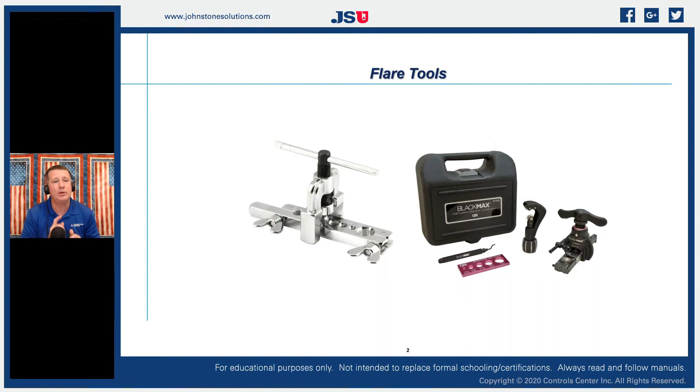We're starting to see a lot of changes to that. But the thing I always ask technicians is, do you still use a traditional flaring block or not? So let me launch a quick poll here to get an idea of how many people use a traditional flaring block over a more modern clutch style flaring tool. I'll give it just a minute or so, because what I see in the industry is quite a mix, and it depends on what you've experienced as you've developed into the industry.

So the poll says 67% say they do not, 33% say that they do. That's really where it comes into play, understanding the differences in flaring tools. I grew up with a traditional flaring tool, but it wasn't until I started doing training and understanding the benefits of a modern style clutch flaring tool that I realized how I've been doing things not so well over time.

One of the things we typically experience in the industry, especially working with manual flaring blocks, is when we have leaking connections, it tends to be one of two things: a split or crack in our flare, or a flare that just wasn't completely flared to begin with.

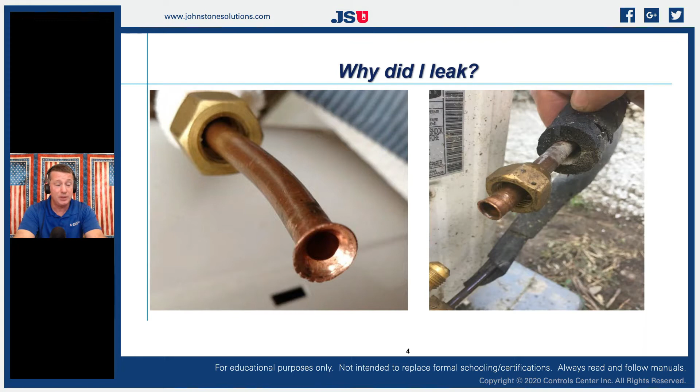And as we started moving into like R12 refrigerants, it was still fairly low pressure. As we are moving into higher pressure refrigerants, now we have to start thinking about the integrity of that flare a whole lot more. So we've started developing techniques and tools so that we can get consistent flares. And I'll be honest with you, I was pretty good at doing flares because I did them for a very long time.

But how could I judge the consistency of them? Not very well. So if we think about what we're doing with a flare - we're taking a drawn piece of copper, typically some type of soft copper. We're trying to take that copper that starts out with nice, clean, perpendicular walls, and we're wanting to bow those walls out at a particular angle, and then we're going to be able to take two mechanical fittings and put that copper in between them and allow that copper to now become a seal between those two mechanical fittings.

So for that to be a seal, that means I'm going to have a little bit of compression on that surface. And that's where we start understanding the difference between using the traditional mechanical block and the modern clutch style, because that amount of torque that I use when I'm making that flare is going to determine whether that lip is actually going to be able to be compressed into a seal or not.

Because if you use a high amount of torque on that traditional flare block, we're going to compress that copper to where it's no longer malleable, to where it's very rigid and is not truly a seal. It's just another form of hard material between our two very hard pieces of material, typically steel or brass, for our fittings, both for our flare and for our male fitting.

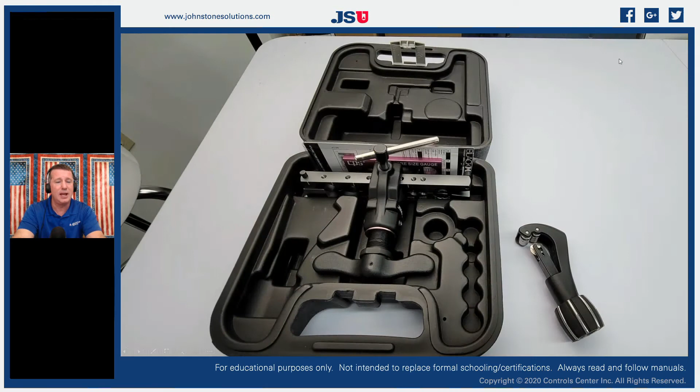So getting a proper seal between those two fittings is now becoming a whole lot more critical. So in our classes, we've been doing a lot of training on using the clutch style flaring tools, and that's what we're going to talk about a little bit today.

So my brand of choice is the CPS, the Black Max stuff. Everyone makes one - Yellow Jacket, JB, they all have some type of clutch style flaring tool, which I'm going to show you here in a minute why it is so much different than a mechanical block.

And we're also going to talk about spring controlled tubing cutters. Even though that would look like a traditional tubing cutter, it's actually not exactly the tubing cutter that you're used to using, and I'll show you why here in just a second. And we're going to use a gauge to be able to make sure that we get consistent flares, to make sure that we're getting the correct diameter so that we have enough of our surface to be able to compress and to make a seal.

So let's talk about this one real quick. On a traditional tubing cutter, we simply have a solid armature between our handle and our pushing rod, which is going to put the pressure on our copper. But you'll notice on some of these modern tools, we've actually got a spring inside of that.

And that spring is going to put constant tension onto that cutting tool. So with these, instead of not knowing exactly how much pressure to put on that tubing before we start cutting, now we have an exact amount of pressure that we can put on that thing, so that we're not putting an excessive cutting ring into that copper.

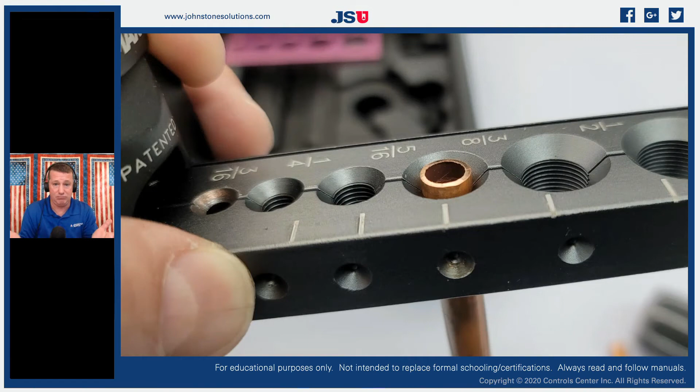So when we move our flaring chuck up over the block to the proper place, we even have indicators so that we know exactly where to line up our chuck, because our chuck is actually going to be perfectly centered into the middle of that hole. And if you remember, those of you that have used a traditional flaring block, there's no such thing - hopefully you get it centered.

And remember, on those traditional ones, that conical flare is centered, and it does not rotate at all. It sits perfectly centered. So if I don't get that perfectly centered on my copper, I have the chance of actually wobbling over to the edge. I've done that before and had a flare that's kind of cockeyed.

So we're actually going to use dimples that are in the side of our flaring block, and then there's a small pin that actually rests on that. And then when we are there, we're going to be able to run that down into the dimple, and it's going to lock us into place. So it's going to be a very, very firm, centered position to be able to start our flare.

And we're actually on our flaring cone, it's actually designed to be off-centered so that it's wobbling a little bit, but under a predetermined amount of space. So it's got a small wobble so that it's cleanly starting to move that flare. Instead of pushing the entire piece of copper down at once to make a flare, we're actually slowly going to start reaming it out from the outside.

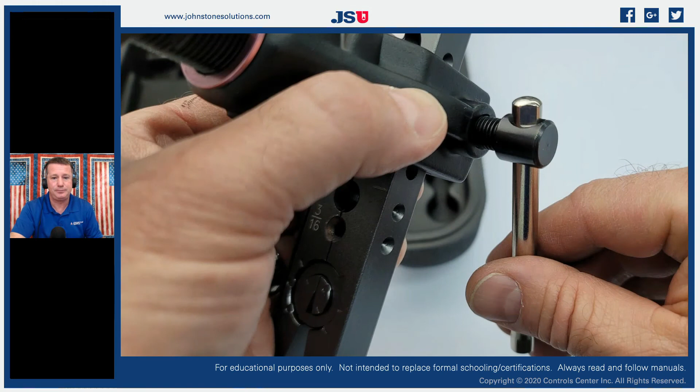The next important thing about these style tools is it has a clutch with a predetermined amount of torque, so that when we get down to the final turns of making our flare, there's no guessing on how much pressure to put on that. There's not that difference between someone who doesn't have a lot of hand strength turning it and someone who has massive hand strength and over-cranking it. Because if you over-crank that, you're going to compress that copper lip so far that it's going to be hardened and tempered, and it doesn't have any malleability to it.

It's not going to compress to make a seal. It's just another hard surface in between two other hard surfaces, which means to make that thing seal up, it's going to take a lot of torque to get that to properly seal. So we need to make sure that we're getting that nice consistent lip. So we have a clutch that will do that for us, and it gives an exact amount of torque every time, so that the thickness of our flare is going to be exact every time.

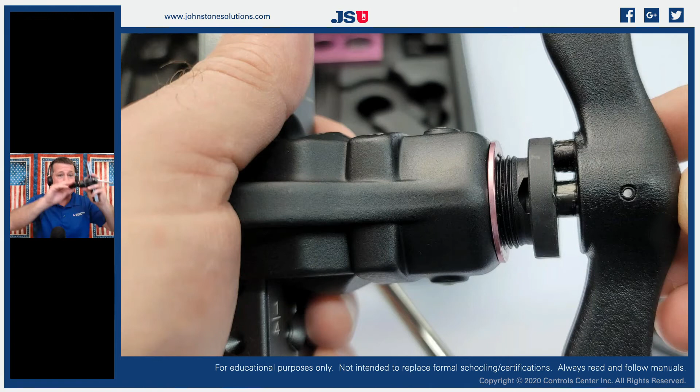So when we get to the end of our torquing, it is actually going to skip back out of its clutch assembly. So if you look at that, let me grab my Sharpie real quick.

If you look at that little stub, it will pop out of its chamber when it gets to the exact amount of torque. So you cannot over-torque them. When you get to the amount of torque that clutch is set to, that's all. It will just continue to spin. It will not push it any further.

It's very easy to feel. When you get to that point, you'll actually hear it click. And you can see I'm starting to rise up right now. As soon as I get to that point, it will actually skip out. There - and there it is.

And once it skips, it's free. It can't put any more torque. No matter how much I spin it, it is not going to put any additional torque. So that now guarantees that I have a predetermined flare thickness. So now I have the proper amount of meat to put a seal in between my metals.

That's the difference of using these style of tools. It gives us a consistent, predetermined amount of flare, so that when we torque this thing down to spec, there's no guessing. We've completely taken the guesswork out.

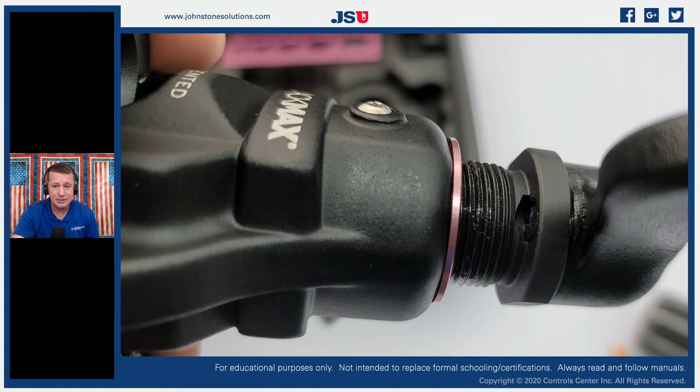So that's what it looks like when it's in its recess, and then it pops out as we get a certain amount of torque. And then it's just a matter of loosening up the tension on our chuck, and voila, we have a fairly perfect flare.

Now, if I'm looking at this one, I probably wouldn't have passed this in one of my classes because I'm very particular about it. If you'll notice, my copper actually had right here just a little bit of copper that wasn't 100% consistent. But if I look at some of those that I would have used with a standard traditional flare block, I wouldn't have even had a lip out there. It would have been compressed pretty well flat.

And that is where we get the splitting of our copper flare, if we don't have that consistent. Because if we have any place along that rim that is not consistent, when we go to torque that nut down, that is going to be the place that fails. And over time, when we have vibration and expansion and contraction of those dissimilar metals, that will also be the place that fails.

So it just gives us the opportunity to create a pretty consistent flare. And once we have created that flare, now we need to be able to check the thing. So in that toolkit, we're also going to use a gauge.

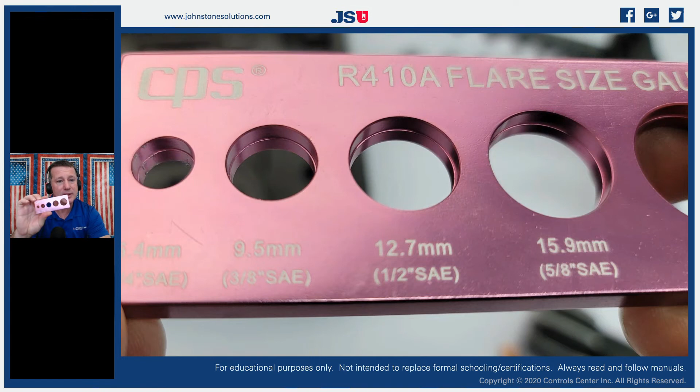So if you use a spring-loaded cutting wheel, if you use a clutch style flaring block, and you gauge it across an OEM specification, you are going to have an OEM specified flare. And you'd be surprised how easy it is to duplicate that with this modern style flaring block.

So in our classes, I'll actually have both out. I'll have a traditional manual flaring block, and then I'll have a modern clutch style flaring block, and I'll just put out a bunch of pieces of copper and a gauge and go, okay, let's see how many flares you can get correct on the flare gauge with your manual flaring block. And oh, by the way, bring yours in from your van so you have the one that you're used to using, or you can use mine, whichever.

And then let's move over to using the modern flare. It's very surprising - typically with a manual flaring block, only about 30 to 40% of the time can people actually get them to rest properly on the gauge. And with a modern style, it's above 90%. So a very significant difference in the quality of flares that we can produce using the modern style flaring block.

So if you are working on mini splits, installing mini splits, multi splits, commercial refrigeration, industrial VRV - anytime that we're using flares, that's going to be your ally. Because from the technical support side, I will tell you, all of our calls for mini splits and multi splits are either wiring or improper flares.

I can't tell you how many site visits I've been on for poor performing mini splits just to find we have leaking flares. If you've worked on a mini split, we don't typically have an expansion valve on the indoor unit. The metering device, typically an electronic expansion valve, is at the outdoor unit, which means we cannot read superheat and subcooling like we can on a unitary system. I can't tell what my refrigerant charge is in a mini split.

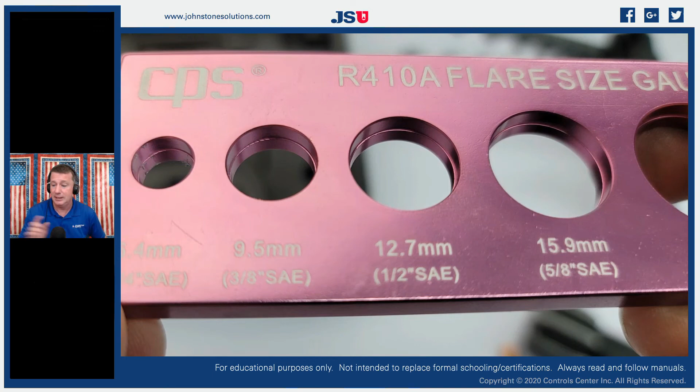So start looking, if you want to come to a class sometime, if you're in our areas or you have a shop or a wholesaler that stocks clutch style flaring blocks, take a look at one. Try it for yourself, and I think you'll see real quick it will be worth your investment, because whether you're an installer or a service person, using a modern clutch style flaring block and the proper tools, you will produce quality flares that don't leak.

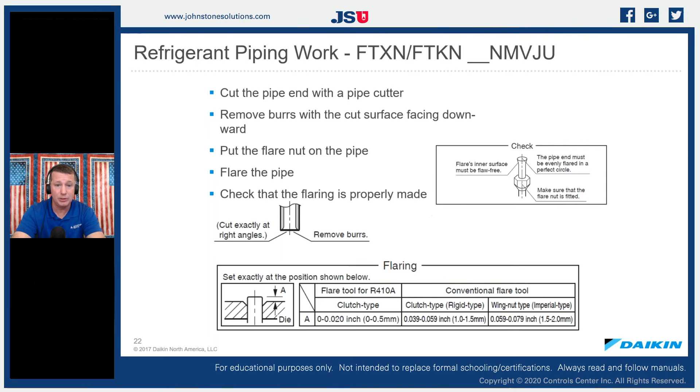It's that simple. When we look at the installation manuals, they're pretty specific on the type of tool to use, how thick to make that shoulder, how far to deburr it. We're also going to start talking about how much torque to put on that nut, because that's the other thing.

Traditionally, if I was making a flare, I had two adjustable wrenches. How much torque did I put on that nut when I put it together? Good question, huh? Sometimes hand tight plus a quarter turn. If it was a 7/8 flare nut, it might be hand tight plus almost a full turn, but there was no way to measure that. There was no consistency, no scale or gauge to tell you how far.

When we move into these modern pieces of flared equipment, it's very specific. Looking at these numbers: for a 1/4 inch line, it's between 10 and 12 foot-pounds. For 3/8, it's between 24 and 29. For 1/2 inch, 36 and 44. For 5/8, 45 and 55.

So how much torque is that? Have you ever really thought about it? In the past, I thought I used about the same amount of torque for every flare nut, and that would have been incorrect.

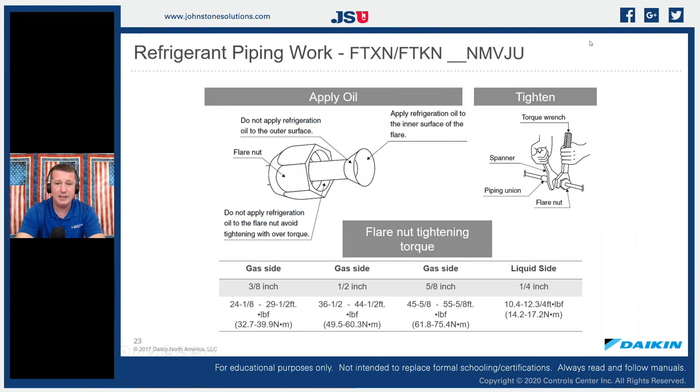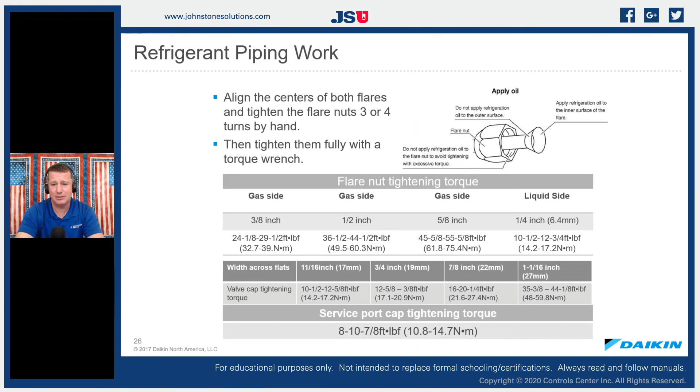Now we need a way to check that, right? We need to make sure we're using the proper tools for doing this. Taking that into consideration, I've got a question for everyone, just thinking about torque and how much pressure to put on something.

How much torque is used to install a spark plug? Hopefully some of you have had the chance to change spark plugs in a vehicle, lawnmower, or chainsaw, and maybe you haven't — that's okay, it's a good time to guess. But for those who have changed spark plugs before, have you ever thought about how much torque is actually specified for that? Let's take a quick poll and find out.

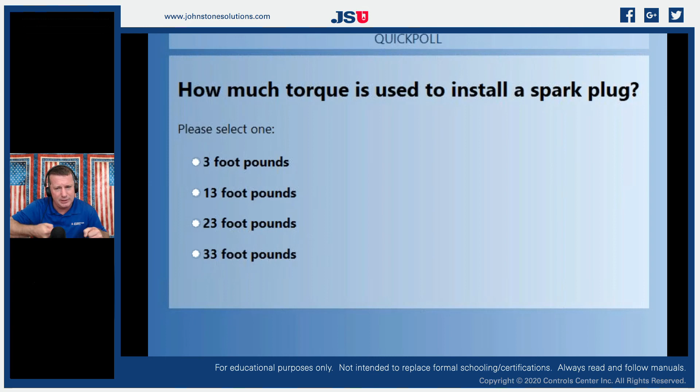Is it 3 foot-pounds of torque, 13 foot-pounds, 23 foot-pounds, or maybe 33 foot-pounds? Maybe you don't even know — I wasn't 100% sure until I put this class together and started looking at it. It's interesting, because I was trying to find something most of us would hopefully be familiar with: how much pressure do I put on that adjustable wrench when putting that spark plug in?

The poll says 50% of people say 3 foot-pounds, 50% say 13 foot-pounds. It's actually about 13 foot-pounds. That amount is for an aluminum cylinder head with typically a 12mm spark plug, which is what a lot of automotive spark plugs are, 12 to 14mm.

So if we think about that, that's not a lot of pressure. When I'm putting that spark plug in, that is not a lot of pressure. That's the amount of pressure that we would need on a 1/4 inch liquid line on a mini split installation. Man, that is not very much. I could probably do that with 2 fingers. That's not a lot of pressure.

So using the proper tools to set the torque on these things is the difference. Because in the past, I would use how much torque? Enough. That is how much torque that I use to close and seal up a flare. Enough torque, however much it took to seal that up. Not realizing that once I got past the torque that was needed, which on a 1/4 inch line is only around 13 foot-pounds of torque, everything past that, all I was doing was degrading the quality of my flare.

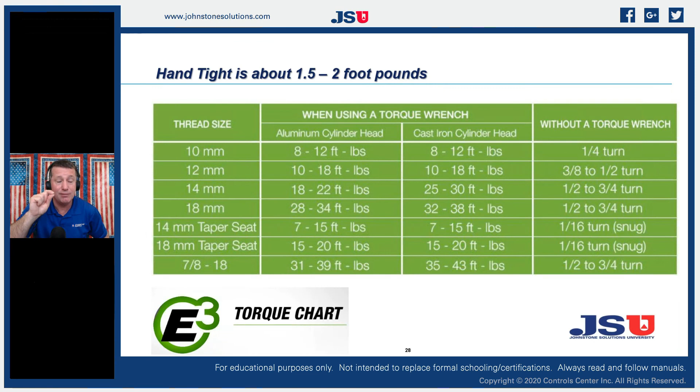I was removing the malleability of it, and I was decreasing the thickness right where that angle is. Where I go from a flat piece of pipe to an angled piece of pipe, I was now putting pressure in that joint, and I was squeezing down that copper for every extra foot or inch-pound that I was putting onto that fitting. So very important to know that we don't use the same torque on these different fittings.

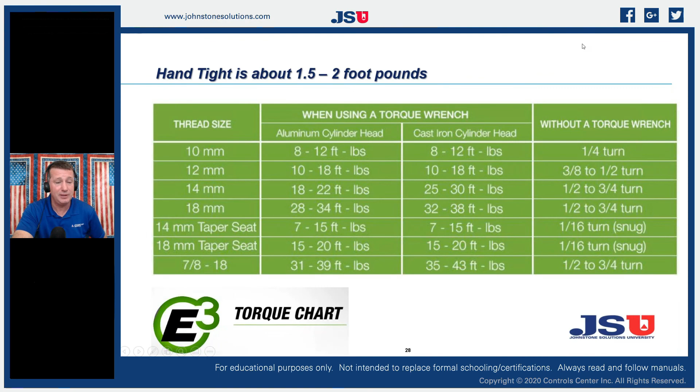We need to use a torque wrench. And those torque wrenches, those proper flaring blocks, they're all available at your local Johnstone supply. We carry a variety of them. We carry the Daikin toolkit, which has actually been the CPS tools up until recently, and they recently switched over to JB. We also carry the Yellow Jacket, and these are designed for mini split, multi-split refrigeration installations and should come with everything that you need for that installation.

The one thing that I have found in some of the kits is that they do not come with that separate flare gauge. So make sure that you have a flare gauge. If it doesn't come with the kit, you can order all of that separate.

So those tool bags can be a little bit pricey sometimes. So for those of you technicians that are required to purchase your own hand tools, you can buy any of that stuff individually. So if you already have some torque wrenches, or you're just going to go buy a torque wrench from another tool supply, that's fine. You already got your own gauges.

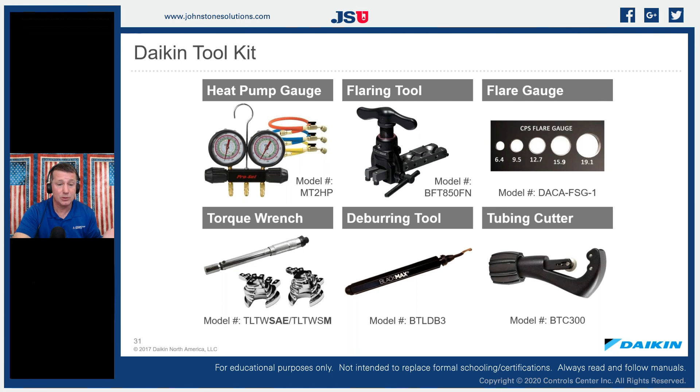Make sure that you're getting a quality flare tool, a quality flare gauge, and a quality tubing cutter. Because the torque wrench, there's all sorts of different torque wrenches out there, but there's not a lot of the proper flaring tool, gauge, and cutters. And you can buy any of those individually. If you buy one of these kits, it comes with all this stuff. So some of that stuff is not needed. You may already have it.

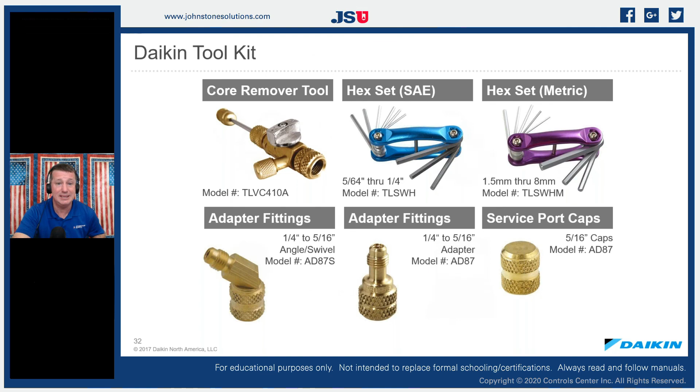So when it comes to flaring, it's very important to know where we came from, to know where we are right now, and to be able to look at the tools that we're using and understand that the tools that we are using may be outdated. And that small investment in some more modern tools that are designed for these installations will change the way your installations perform. Because nobody wants a callback. That's lost revenue. So that one call, that one lost revenue from a leaking flare probably paid for these tools. So something to think about.

All right, does anyone have any kind of questions, comments, thoughts on proper flaring techniques?

It's a good class. I love doing this one. It's great to do it hands-on and be able to feel the difference in those flares and feel the difference in the torque. I always take the biggest guy in the class and I go, okay, here's 2 adjustable wrenches. Put this flare together, and I have them crank it down, and then I'll take my torque wrench and I'll start adjusting it until I find how much torque they put on it. You'd be surprised how many people will put 70 or 80 pounds of torque on a 3/8 flare. That's a lot, 3 times as much.